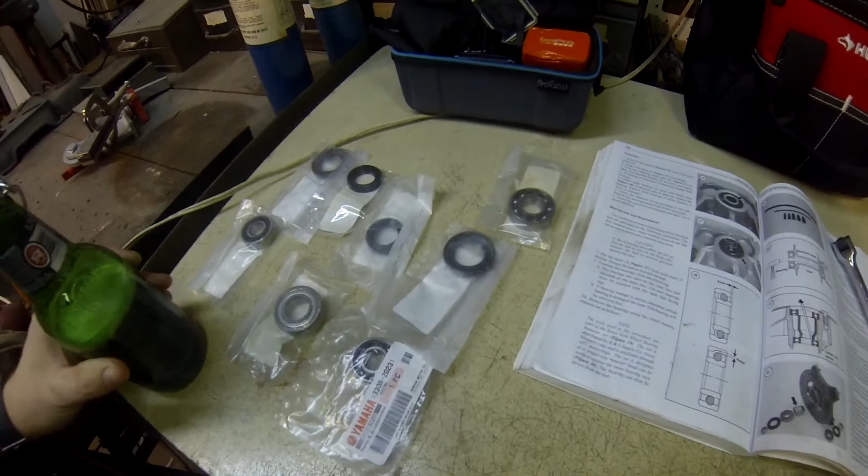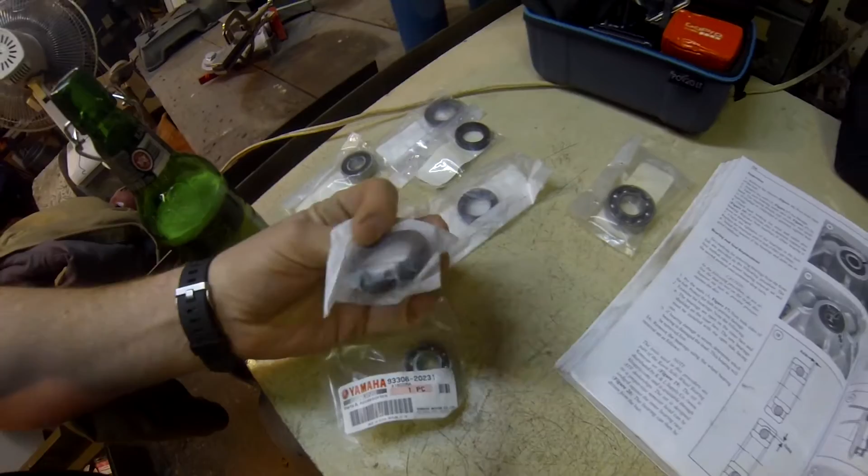I went with aftermarket wheel bearings after the stock ones went, and they only lasted a few years. So I went and bought the OEM ones again, and when you buy them they come in pairs. There's two different sizes, each side has two different sizes, and they come with the seals. I'll show more on that when I open them up.

I got my tools here: breaker bar, extension, ratchet, 14 to get the bolts off to get the wheel off, pliers to get the cotter key off, some punches for the bearings, and I'll be adding more tools as I get into it. I got a grease gun to grease up the bearings when I put them in, and a hammer to tap it out, but I'll explain more of it.

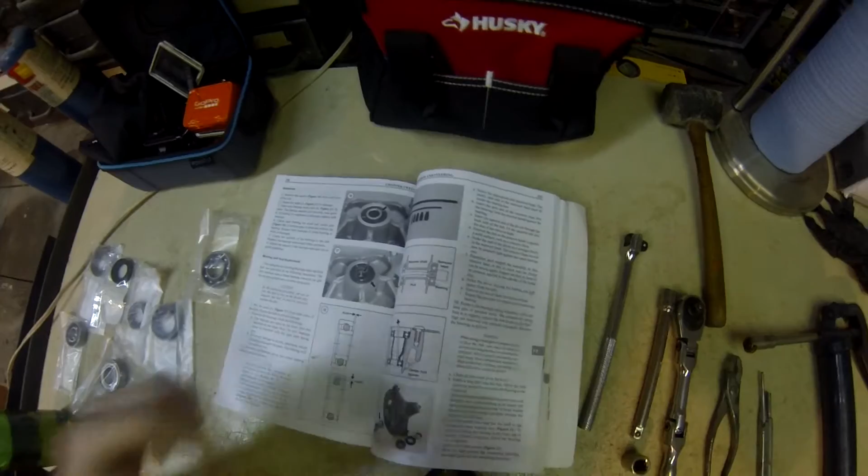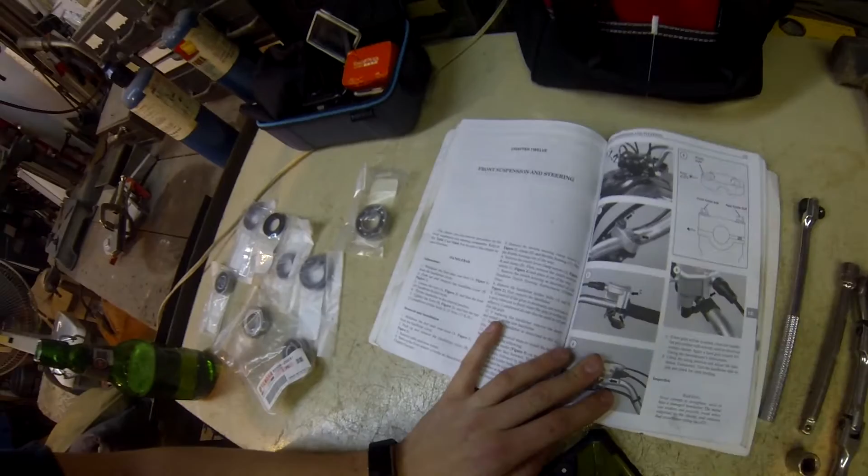This is the Yamaha Raptor 700 2007 shop manual, and this is handlebars. This goes into front wheel bearing here, and I'll hold it over as best I can, so if anyone wants to pause the video and read it.

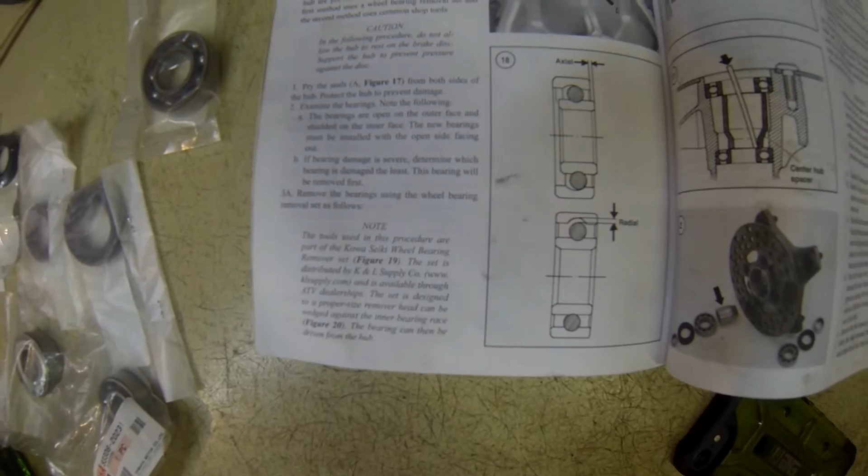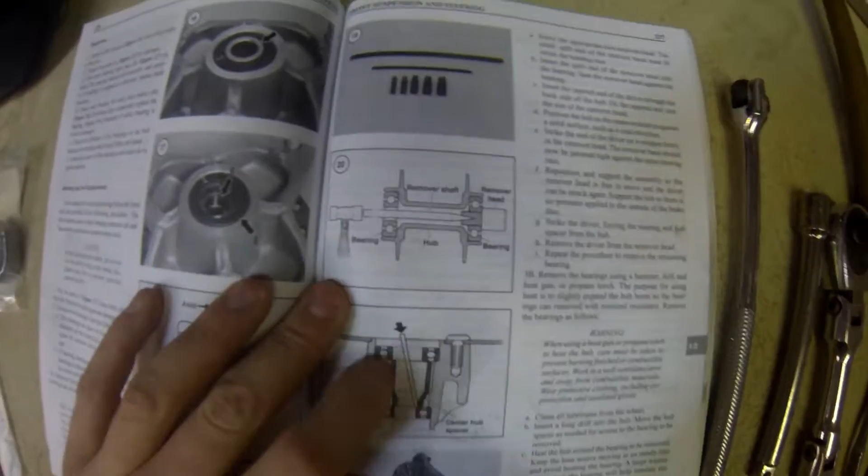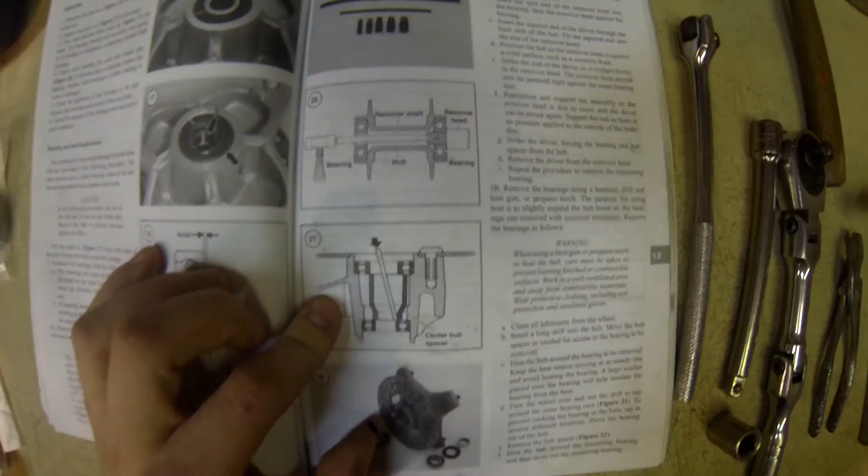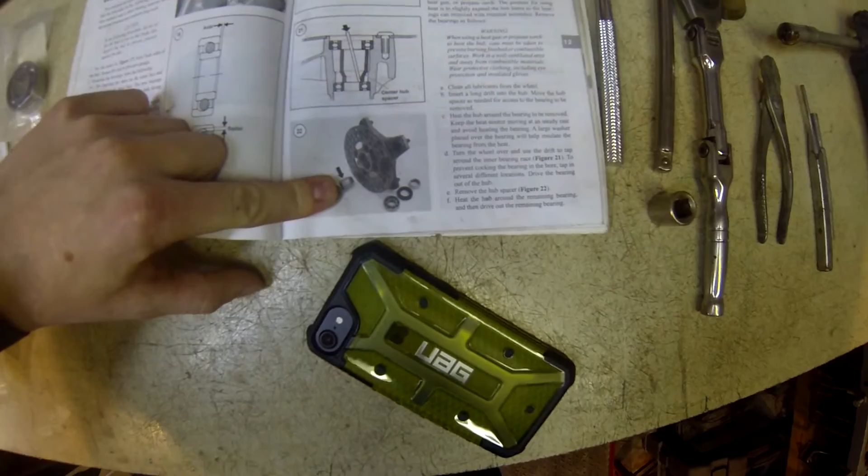I will show you this. This is how, once you take the hubs off, to remove the actual bearings in the hub. They're kind of tricky, it takes some time and finesse, but eventually you can pop them right out. You don't normally have to replace this spacer right here where my finger's at, but I assume it's going to be in good condition, so I didn't buy another one.

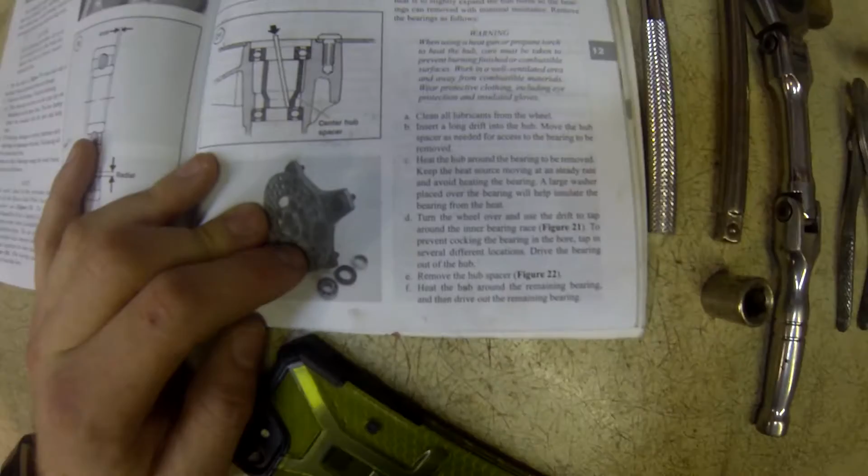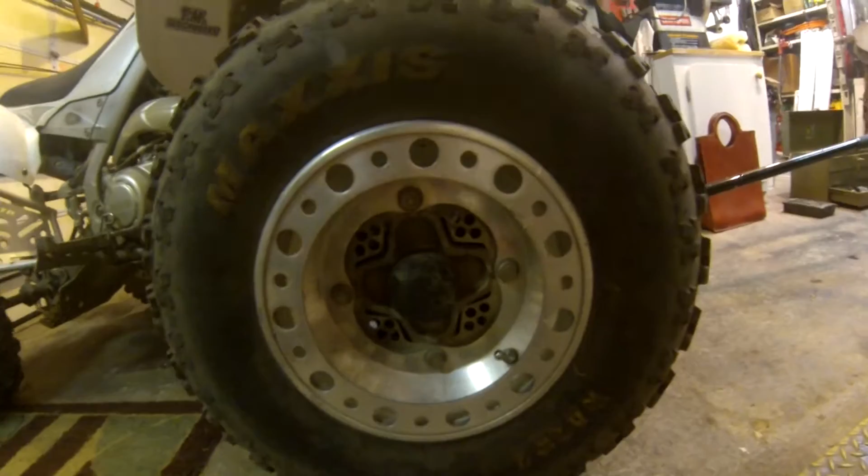Basically what I have to do is take the front wheel off, which I'll leave on the ground. I'll leave the tire on the ground, break the lugs, and then take this off, take this cotter key off. Once the tire's up and jacked up, take the cotter key off, take this nut off, slide the hub off, and then remove the bearings.

It's really not much to it, it just takes some time, and you probably need some shop rags or something because your hands are going to get greasy. My tires are actually a little wobbly, which I'll jack it up and show you here.

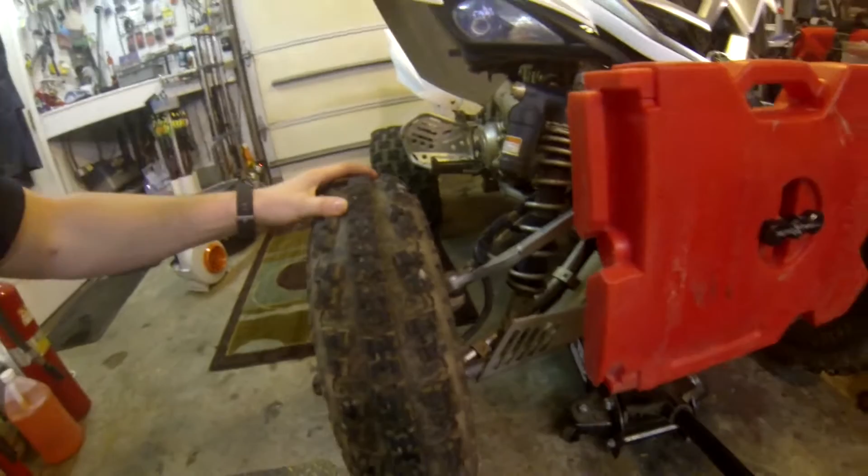I just got a regular car jack. Some people have ATV jacks, I have one, but I didn't feel like it was necessary. You can see my wheel, it's got some flop to it. That's how you check them, you grab them, move them back and forth, and it's got some play.

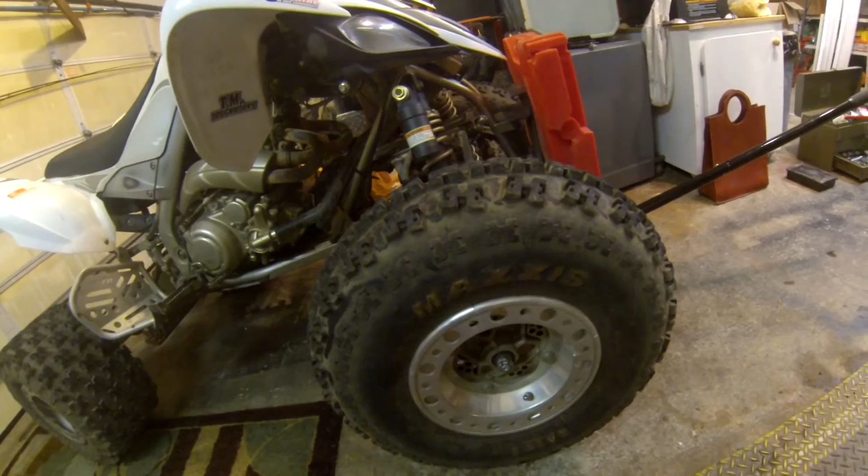I'm running the Razr 2s, I don't know if you can see it. Razr 2 by Maxxis, and these are, I think, the bigger front tires than the stock ones. I also have the Razrs on the rear. This is the GYTR edition, but from 2006 to I think 2008 or 9, the models don't change that much.

But a quick overview: I added some hand guards, an hour meter, redid my seat. Didn't turn out the best, but it's like a motocross seat, the Attack Graphics seat.

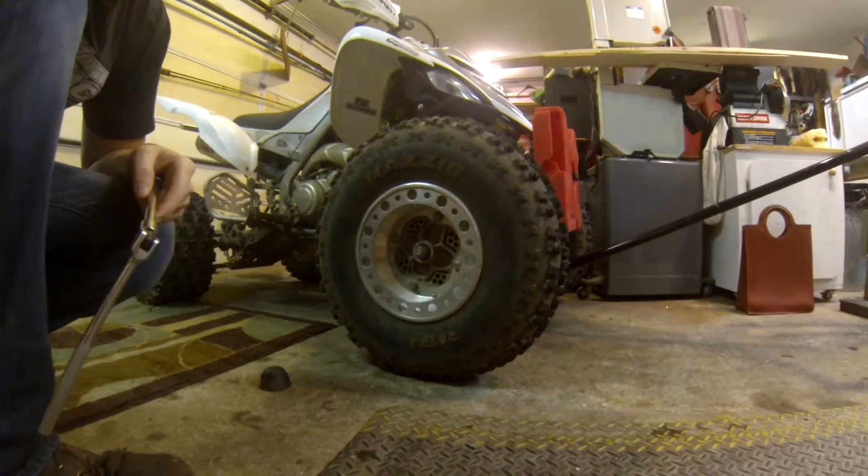But I'll get started here. So first step is to remove the cap and take off the lugs.

You want to make sure to keep your extension straight on there so you don't strip off the lug, because they can wear off, or corners wear down over time. So once you got them all broken, then you want to jack up the quad.

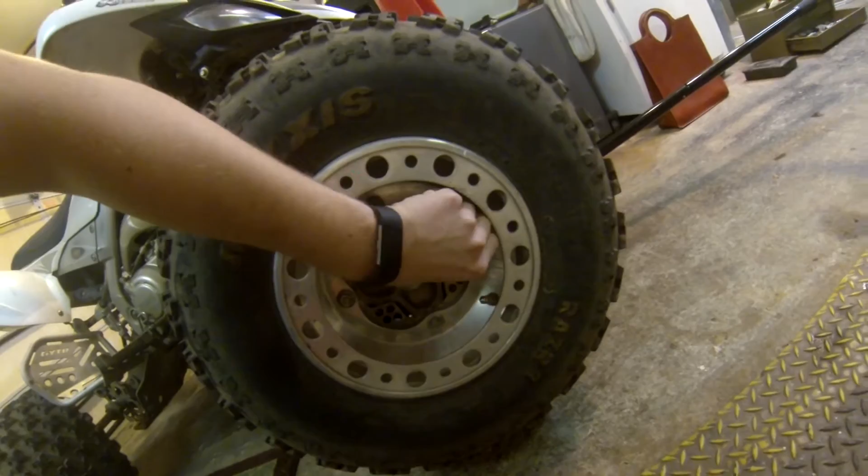Doesn't need to go crazy, just get it off the ground here. Apologize for lighting, it's not the best, but some people do things differently. It's winter time right now, so I'm just killing some time making a video, because I always like to see how people do things, and sometimes people don't know how to do things, so use YouTube to look it up, of course.

So you got your nuts and washers off. Take the tire off.

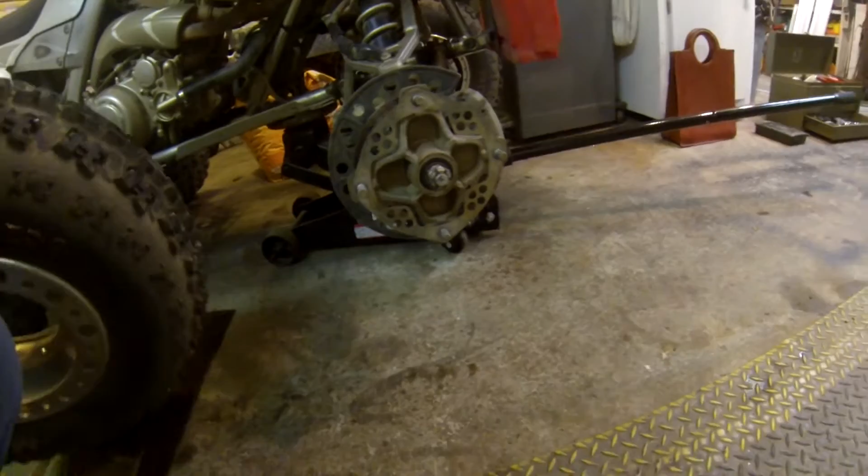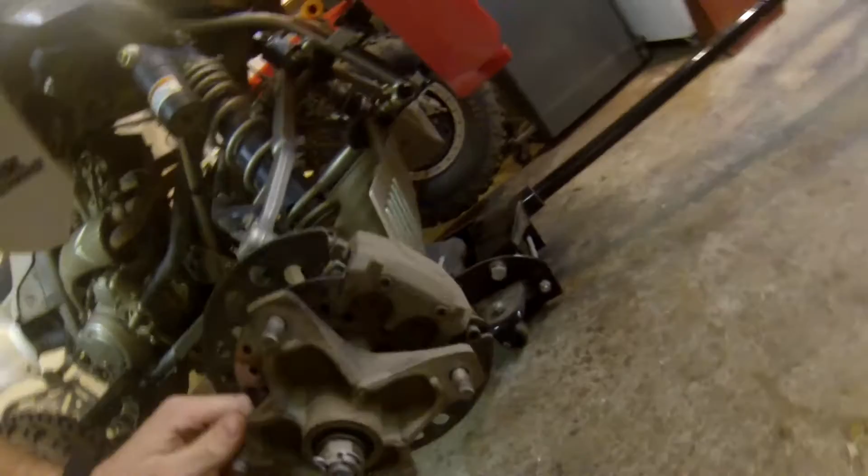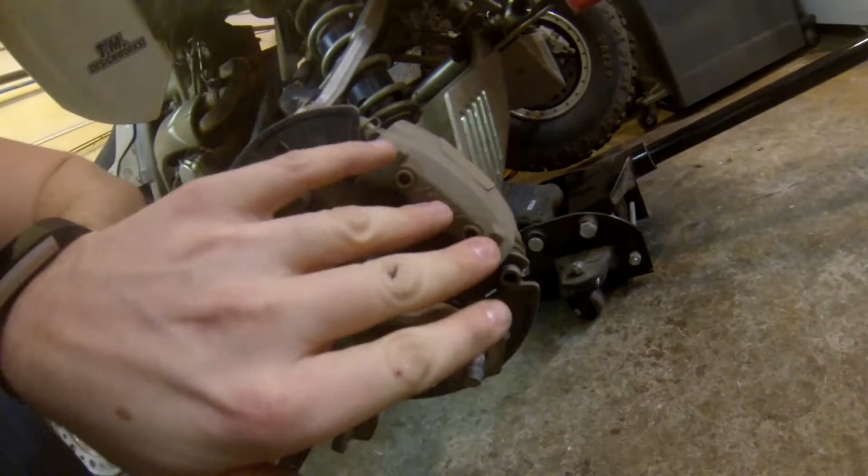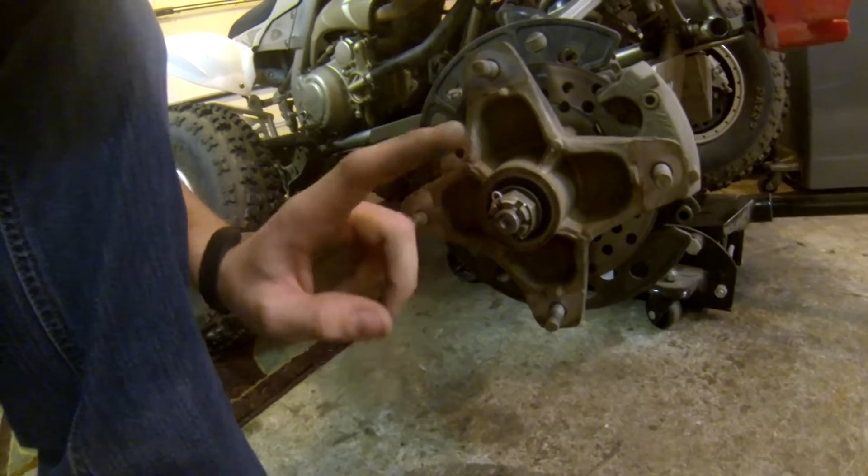Then you do have a guard, and I actually forgot to mention it, but you do need to remove the front brakes, and in order to remove the front brakes, you got to take off these two pins, slide them out, which releases the pads, and then after it's released, you can take the bolts out that hold the caliper on, and then the brakes should slide out, which I'll show in the video. And then after the brakes are off, I will be taking off the pin here, then the nut, and then I will drive the hub off to get to my bearings.

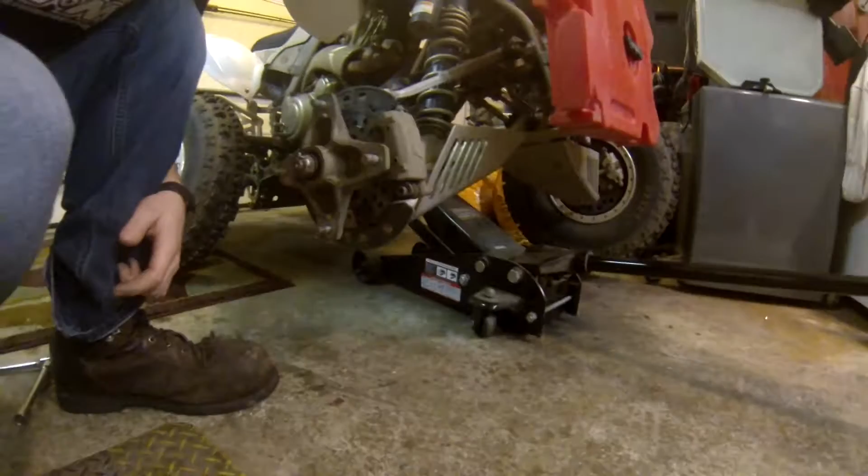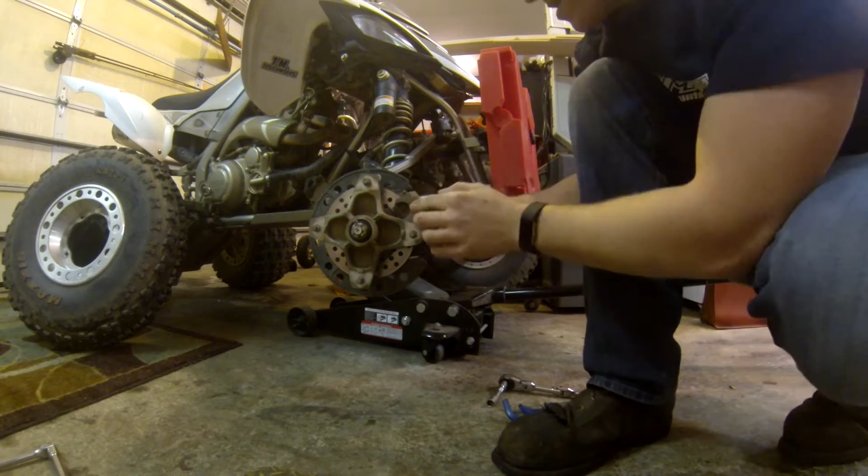Alright, so I'm taking the brake caliper off, and I'm using a number 5 Allen wrench here. Sorry it's kind of dirty, didn't have much time to clean it. Normally my quad's pretty clean. But break these, these are the pins that hold in the brake pads, so you break those.

Might have to spin the hub there in order to get at the pins there. Just for the video, I'm going to leave it so you can see them. And my pins are pretty dry, which means I'm probably going to want to clean all my brakes up and replace all those.

This kind of takes some time here. I'm no mechanic, but I don't like to let a dealership work on my stuff. You just kind of gotta wiggle the pins to get them out. These are pretty... I don't know if I've ever changed the pads on this.

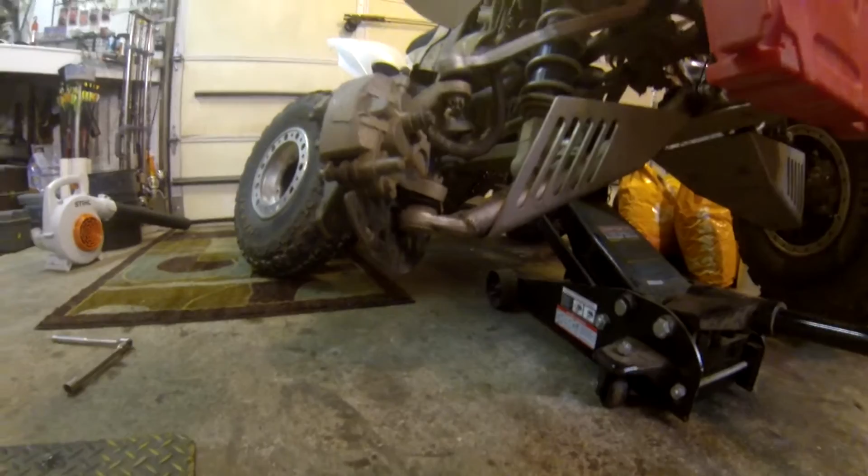I got my pins out, throw them in the pile here, and I forgot to mention that the bolts for the tires are a 14 millimeter. So now that those are free, I'm going to rotate the tire or hub, and you can see that I got a bolt here and a bolt here which hold on the caliper, and I need to take those off.

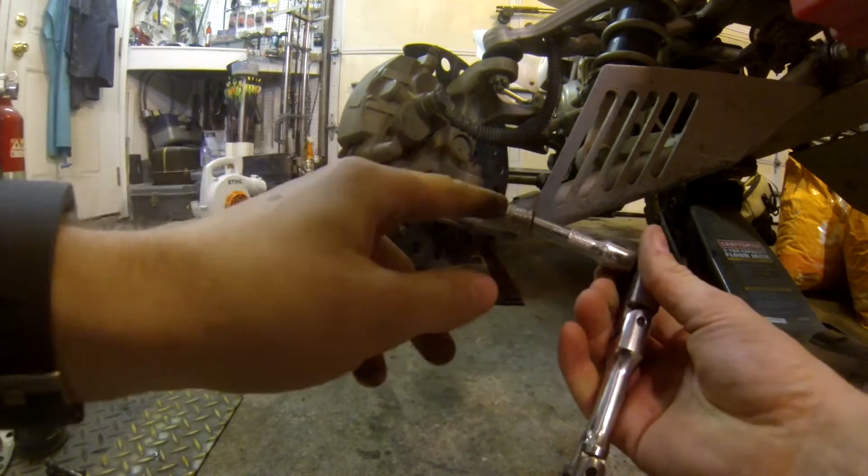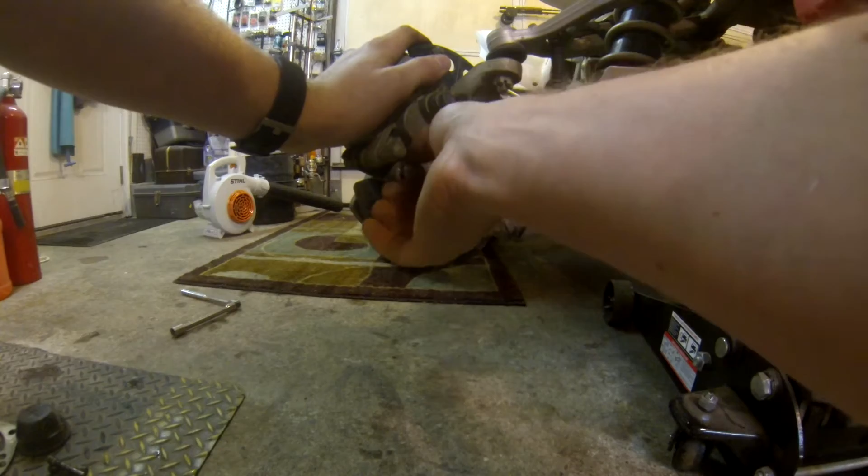So I got a number 12 extension ratchet, and I would recommend when you take anything off to check the bolts and see if they have any Loctite on them. And if they do, when you put them back on, make sure you put some kind of Loctite, or the machine's gonna fall apart on you on the trail, and nobody wants that. But I got my bolts here, and it looks like there was a bit of Loctite on there, so when I go to put it back together, I will add some Loctite.

My Raptor will look a little different here because I do have these A-arm guards. They don't come with them stock. I forgot which brand they are, someone's probably going to ask.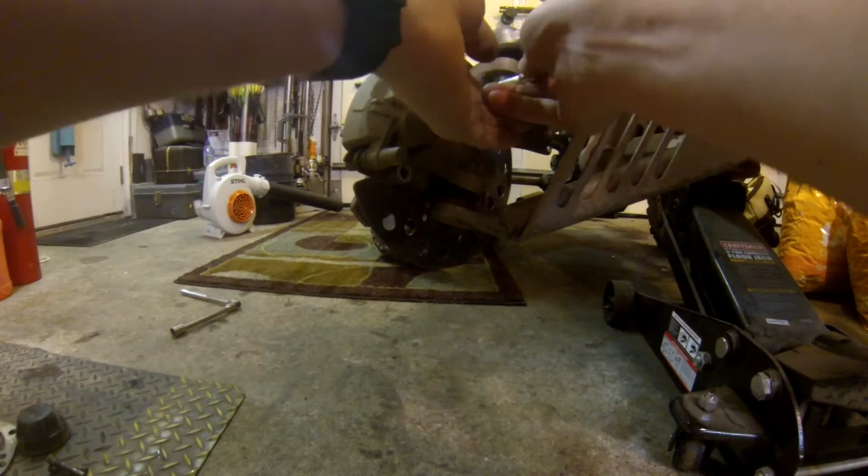So now that I got my bolts out, my pads are loose. As you can see, the caliper's flopping around now, but the pads are still on a little bit. Kind of gotta wiggle them a little bit, get them off, and now I can check my brake pads.

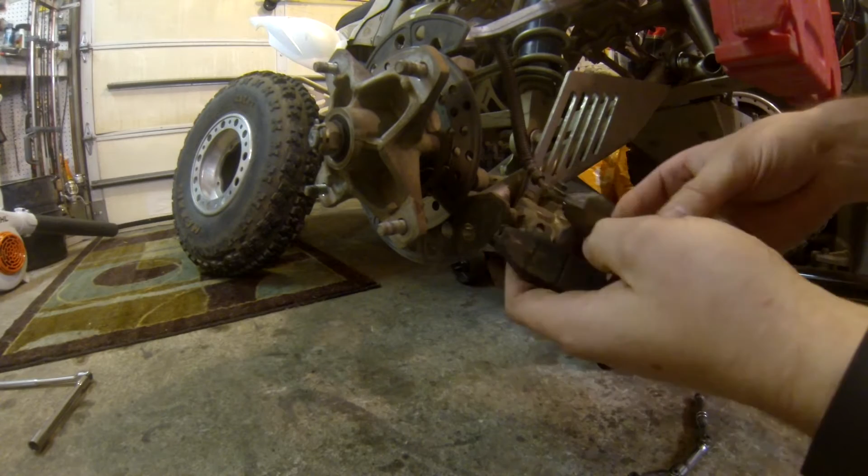Pretty dirty, like I said, you need rags. These are pretty worn down, probably should replace them, but I'm not too worried, I don't use the front brakes too much. But now that I got the pads off, got the caliper, I want to take the caliper here and tuck it up here, keep it out of your way.

Now I want to remove the cotter key, so you need some pliers. So you take the cotter key off. This one I might actually replace because it's kind of rusted up, I do a lot of water riding, mud riding.

So now that I got the cotter key off, I can remove this, the hub nut. Alright, so now I have a 22mm socket with a breaker bar wrench. I wouldn't use a ratchet on it because you don't want to break your ratchet, unless you don't have a breaker bar. But when you go to tighten this nut back on, it is actually 52 foot-pounds.

So I would recommend using a torque wrench to tighten it back down to set the bearings so it's the right torque. Take this off.

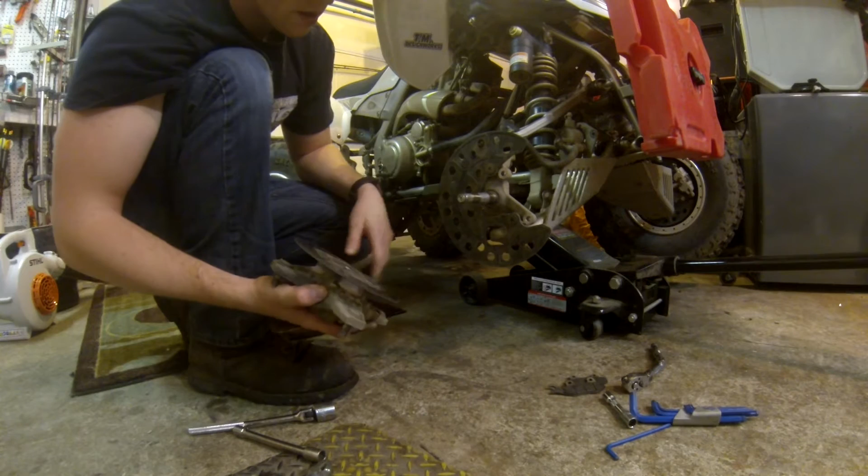This guard right here should be floppy. That's a stone guard, it's no big deal. I know some people probably take them off, but you can see the wear here. I don't know if you can see it on the camera, but...

I could probably use new front brakes, but I don't really use them that much, so I'm not even really bothered. You can check your bearings. Mine are pretty...

Grindy. Stick your finger in there and roll it, you can feel the difference. They should just be real smooth, and these are kind of grindy. I probably could have got another year or two out of them, but I don't like to have any breakdowns on the trail. I would rather do it now than later. Spend more time riding.

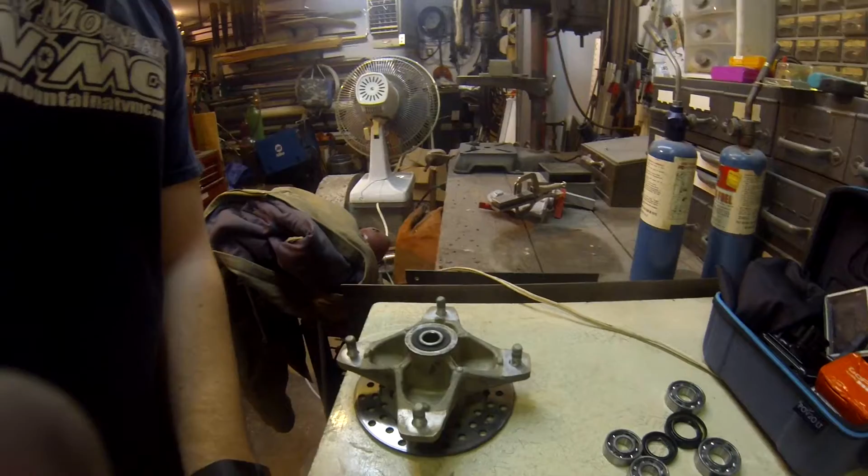Alright, so I've got a couple tools to pry out the seals. These are the new seals. I actually kind of got them dirty.

But anyways, you got spacers in here. Take those out. Stick your screwdriver in here, and you want to actually just twist it all the way around, so your seal pops out.

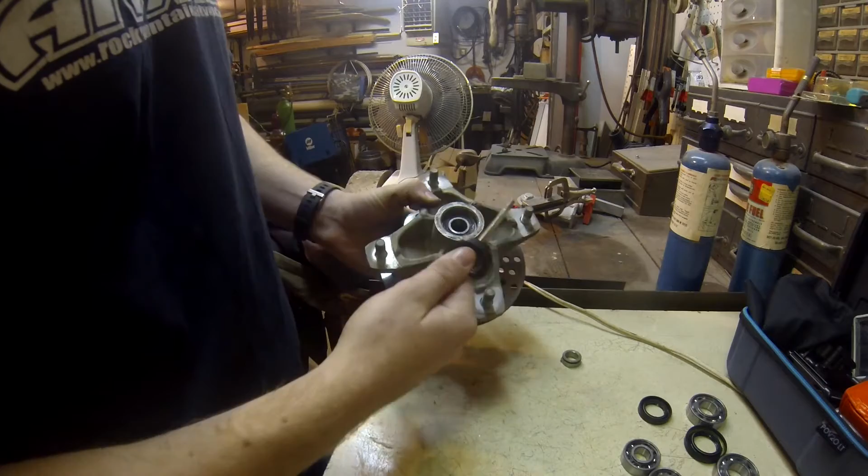And then flip it over. Take your spacer, pop that out. And stick your screwdriver in the other side. Again, gotta twist it and pry up the seal.

It's gonna take some doing. You might tear up the old seals trying to remove them, so it's always a good idea to buy new ones.

I don't know what this tool is used for, but I use it a lot for prying out some stuff. Took a little wrecking bar. So,

I got my old seals out. They're pretty dirty, but not too bad. The insides aren't blown out or anything, but I am going to replace them since I have it apart. You are going to want to clean up all your spacers real good before you put them back in.

This is the part that you kind of have to play with. I don't know if you can see it on the video here, but you got your bearings. This is the bigger one, this is the smaller one, and then inside there's a cone spacer. It's like tapered, and that's where it gets tricky for getting out.

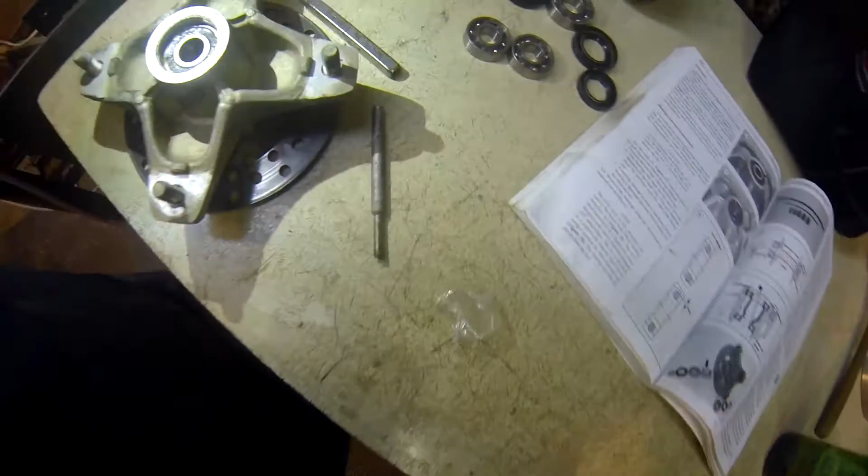So now I have to remove the bearings here. You can't just drive them one way. As you can see in there, I'm trying to get some light in there to show you. There's a little lip, and you got to take the punch, put it on the lip, and rotate it around like this as you pound it out.

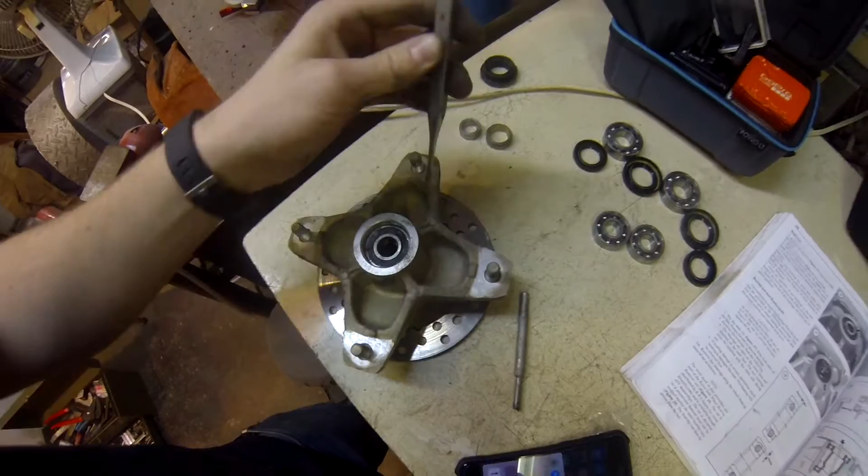And one side, the bearing will drop out this side, and then you flip it, and you do it from the other side. Right here is a diagram...

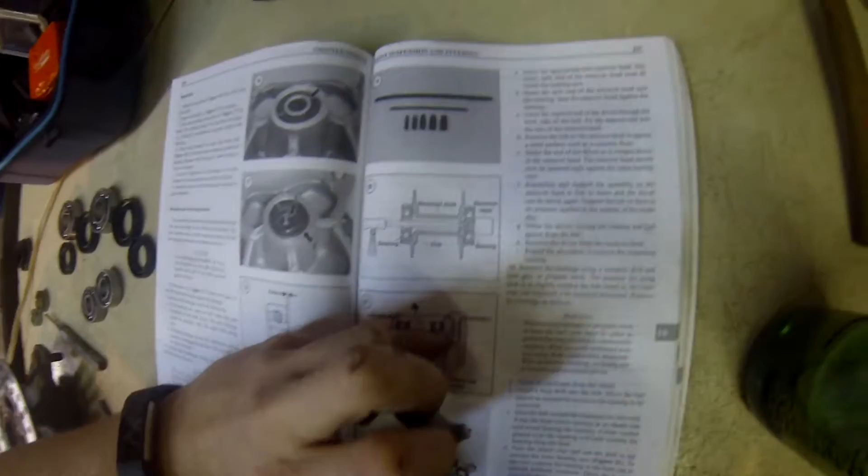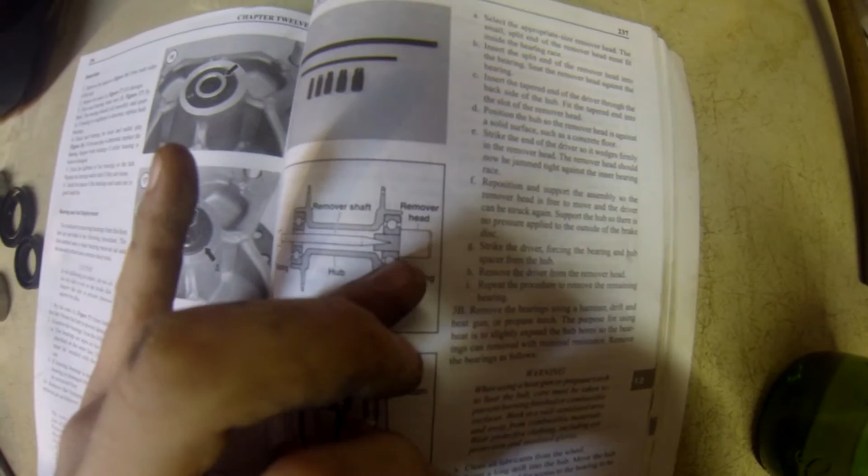Where you got your hammer, you got the bearing that you're going through right here, and you're actually sliding the punch through, and you're rotating it, and you're hammering out right here. You're getting on the edge of the bearing and hammering out. Okay?

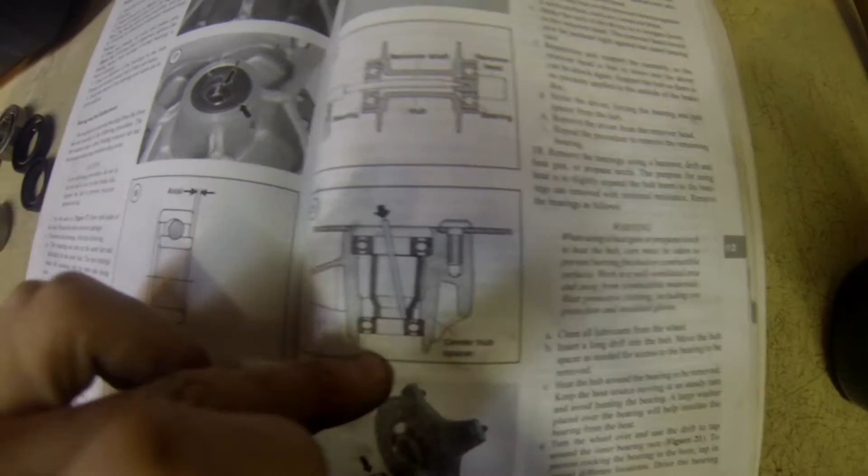And this is the way that the manual says to do it, so that's the way I'm going to show you guys how to do it. If you got another cool way or an easier way, I'd love to know.

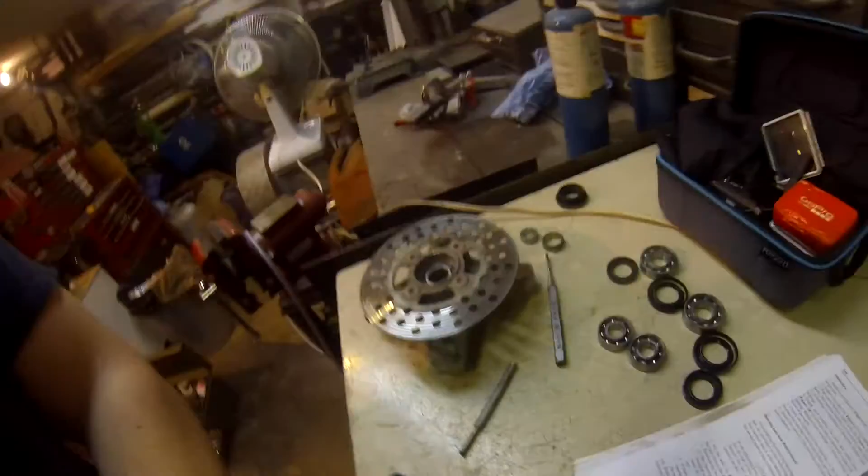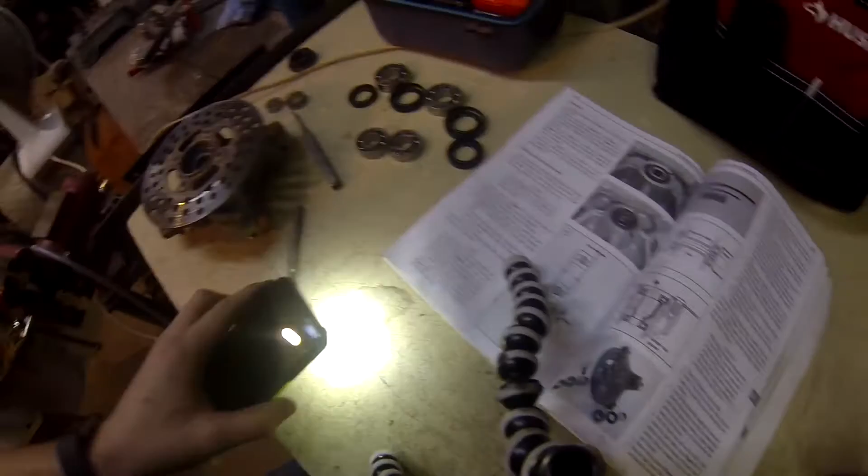So you got a bearing here, and then in between you have this collar, which is this right here where my finger's at. It's like a cone shaped spacer, and you have to remove all those in order to put in all of the new bearings.

So there's really not much to show here for pounding out the bearings. It's kind of hard to videotape or even see, but you gotta take your punch, put it inside, and actually rotate the collar or spacer to the side, and you'll see the lip of the bearing. You gotta take your punch and put it on it.

Probably might have to sharpen up your punch. Like I got some dull ones here. Sharpen up your punch and then put it on that edge and hammer it out.

So I ran my punch here on a grinder because I need a sharp edge to stick in there and hook the edge of the bearing, because it is going to take some time.

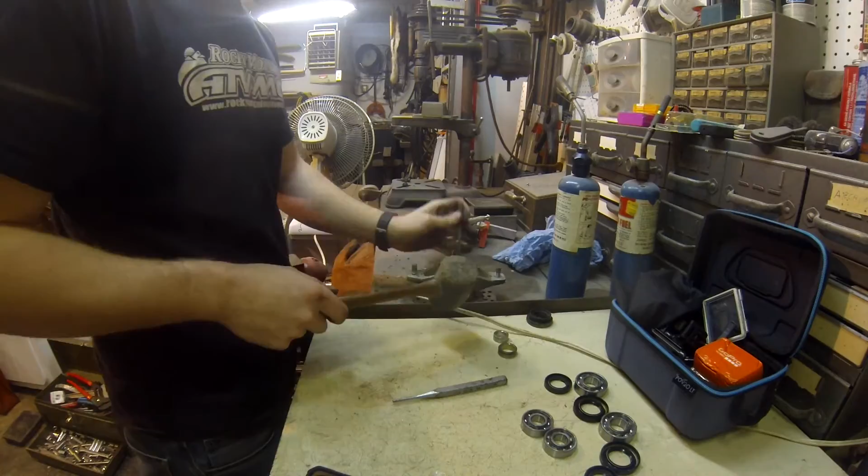So I didn't show this on the video, but I took heat right here. Heated it up around here, flipped it over, took my punch, put it in, and started hammering it out till it came flush.

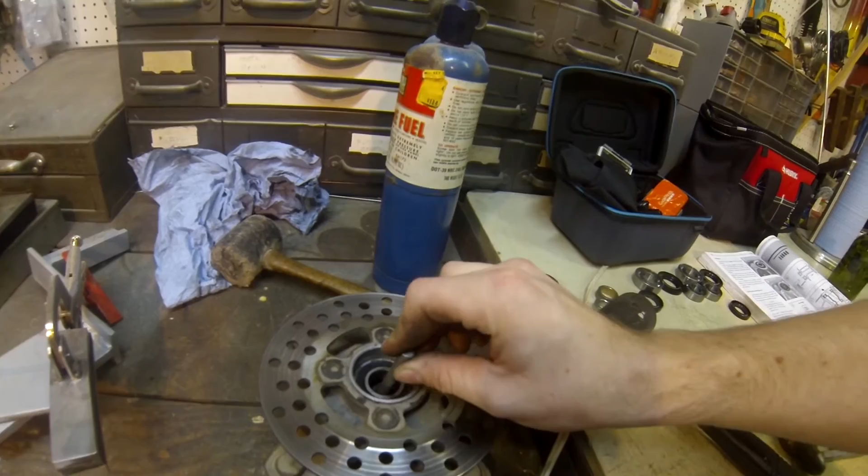It's flush right here, all the way around. Now I need to set it up on something, where my fingers are at, so when I go to punch it, the bearing has room to pop right out, instead of flat on the table, or it won't come out.

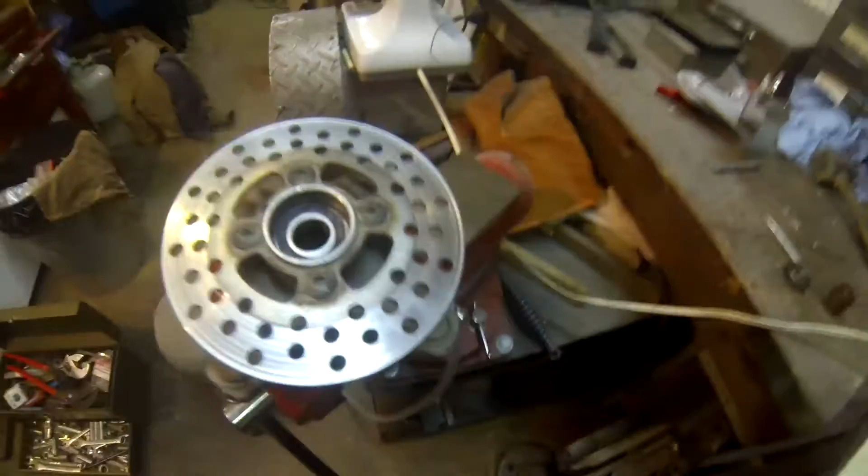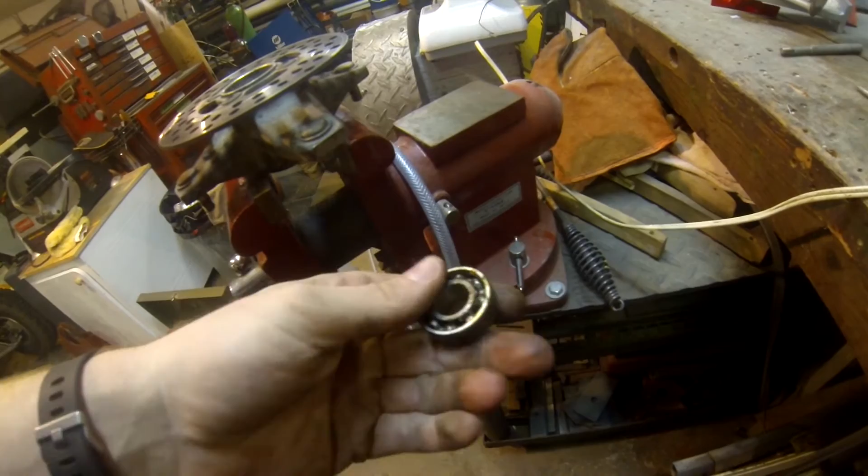So what I did was I put it in the vise, and none of my studs were hitting anything, so they didn't damage the threads. I started punching through, and my bearing dropped out. This right here is kind of hot. I kept adding a little bit of heat, and it makes it slide a lot easier.

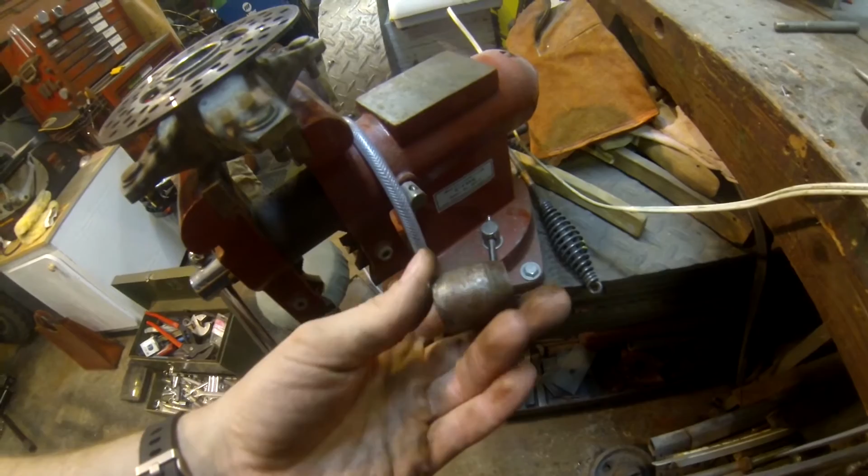And this is the spacer I was talking about. That's the one you want to try and not scratch up, but as you can see, it's kind of rusty. So it was good that I took it out. And now what I have to do is take out this bearing right here.

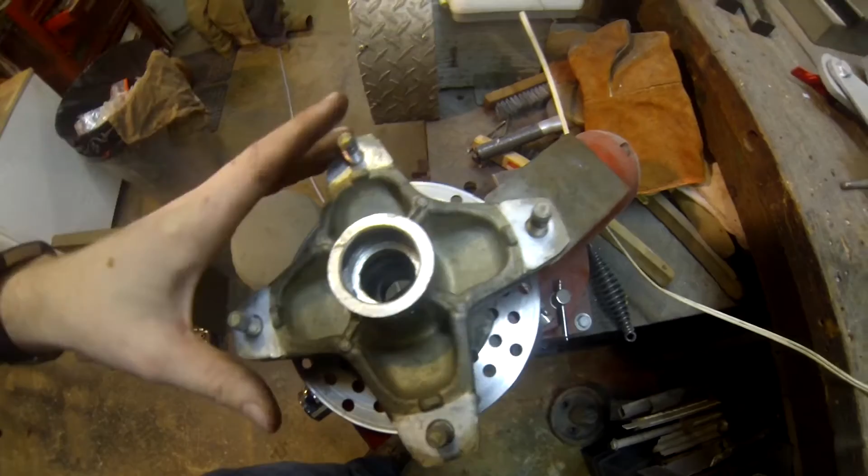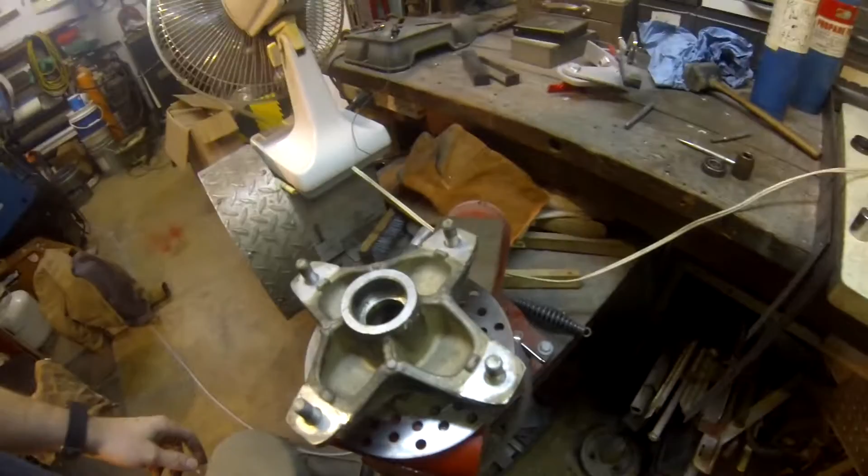There's what the inside looks like. That's why you can't just drive it one way. You got to drive it out one way and then the other way. But now it's easy, so all I got to do is reach in there with my punch and punch this other bearing right out.

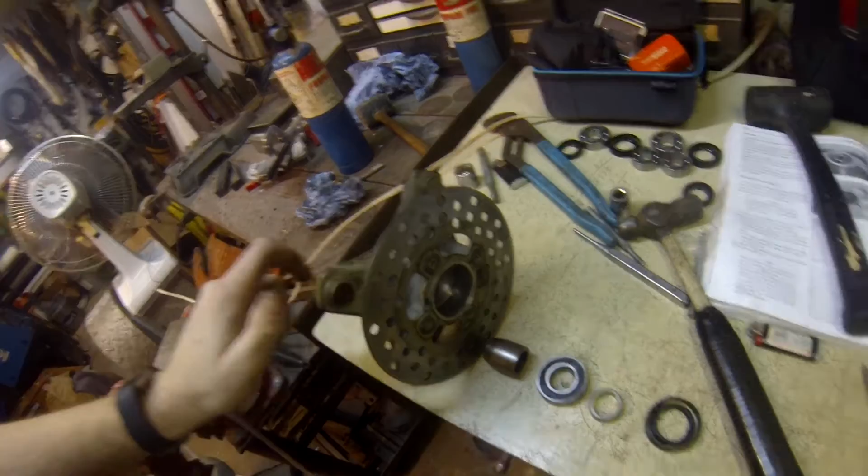So I got out all the bearings, and as you can see, there's that sleeve in there on this side and this side. I got it cleaned up pretty good, and I'm going to show you here how it goes in. So you got your seal, you got your bushing, you got your big bearing for the big side.

And then you got your, I want to say it's a spacer or collar. And this actually slides onto your axle here, and I'll show you.

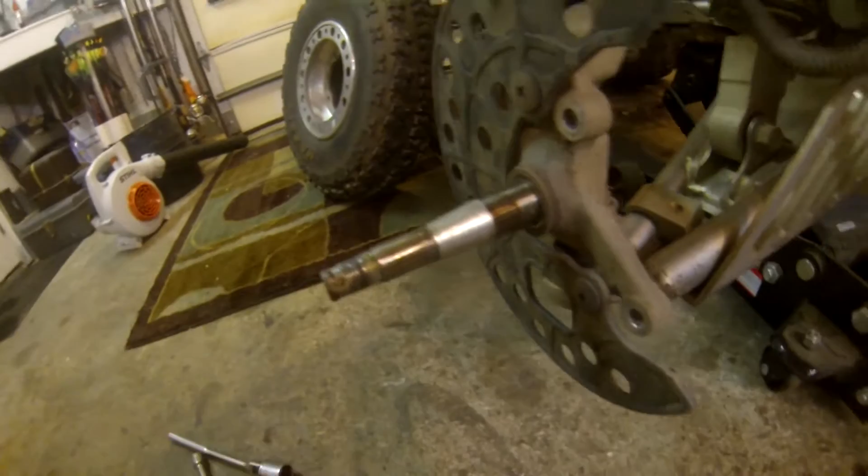So we'll go over here, and when you put it back together, the shaft, if you dent it up any bit from trying to get the bearings out, what you can do - I kind of had trouble with it at first, it'll probably get stuck about there.

You just take your hammer and you lightly tap around the edges real lightly until you can get it to fit. And then slide it on, make sure it's going to work, because you don't want to have the struggle after you already put it back into the hub with the bearings. You want to make sure it's going to work.

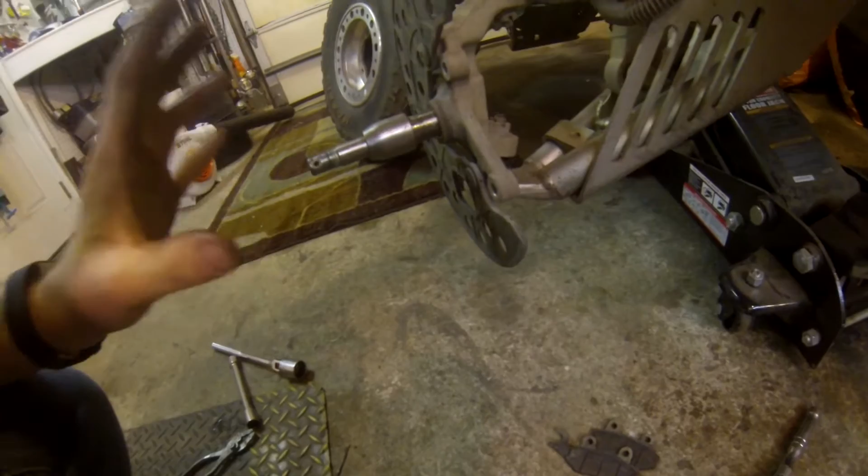So you come over here, and if you need to figure out the exact way it goes inside of the hub, you can bring it over here and set it up and make sure you align everything right.

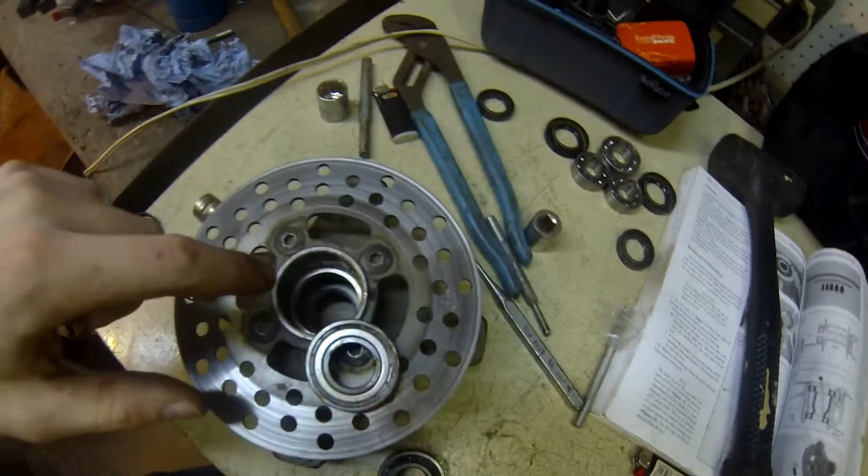So I greased the inside of here, which you can tell it's greasy, and then I greased up the bearing nice. It's kind of slippery, but any excess will just slide right out.

And I packed this full of grease. It didn't come full of grease, but as you can tell, it's got like a metal collar in here, and the aftermarket one had like a rubber one. I will see which one works better. I don't know.

So what I do to set these, you try to get them even and then you slowly tap around the edge, and you want to make sure it's nice and square going in, so you don't bind it going in.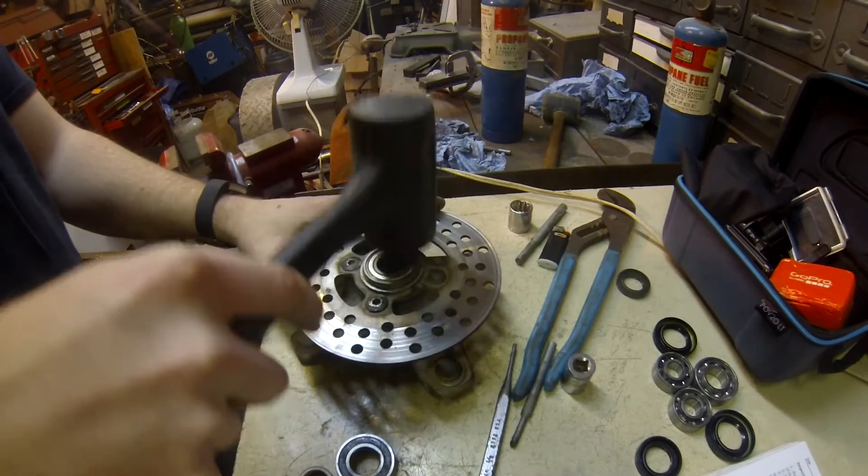So now that I have it in, it's nice and flush, and I will find a socket that fits over top of this, put it on top, and then actually hit the socket with the hammer to set the bearing all the way in.

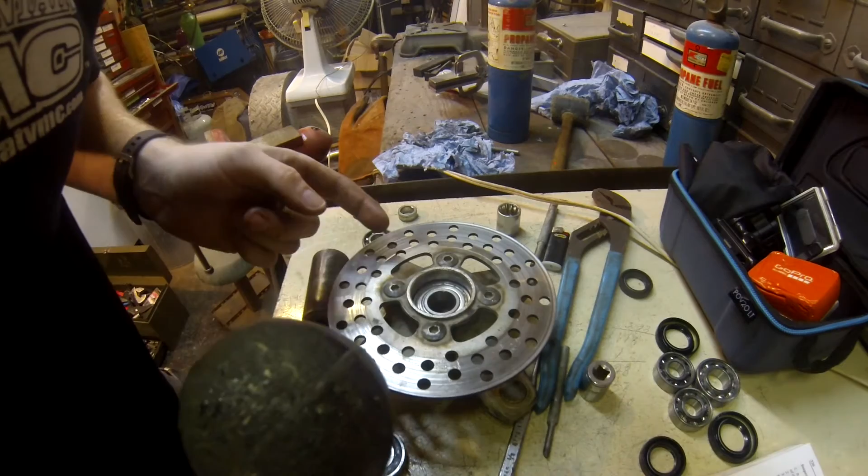When your bearing is set all the way in, and you know it's all the way flush, you can add some more grease to it. I do a lot of water riding, so I always want plenty of grease.

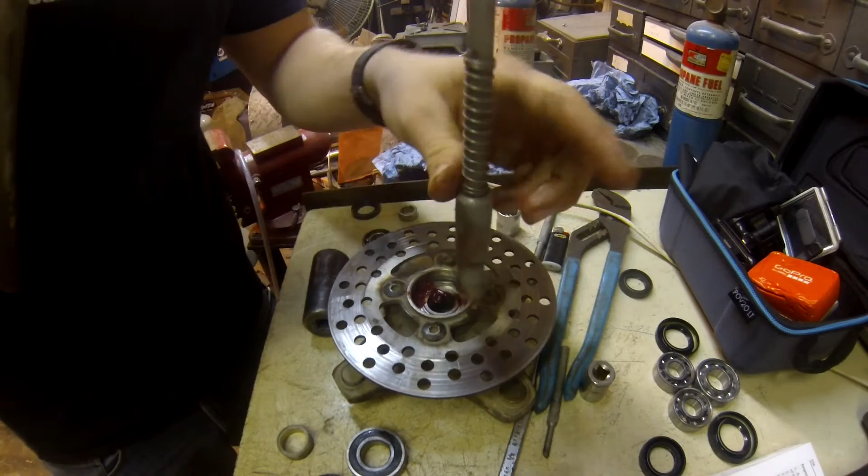The only thing that will happen is if you get too much grease, it'll just come out when you compress it all in, when you put it on the shaft, or when you put the seals on, and then you can just wipe off the excess. So the only thing you're wasting is grease.

Then I'll take my seal and I'll fill that full of grease.

You want to be careful because there's a little spring inside of this seal, and you don't want to damage that spring because it helps it seal. So you got to be really careful when reinstalling the bearings. It's nice and greasy, grease everywhere. You want to put the open side down.

Just push it with your fingers as far as you can, till you get it started. Then you can use a mallet or hammer or whatever you're using to tap it in real slow and easy.

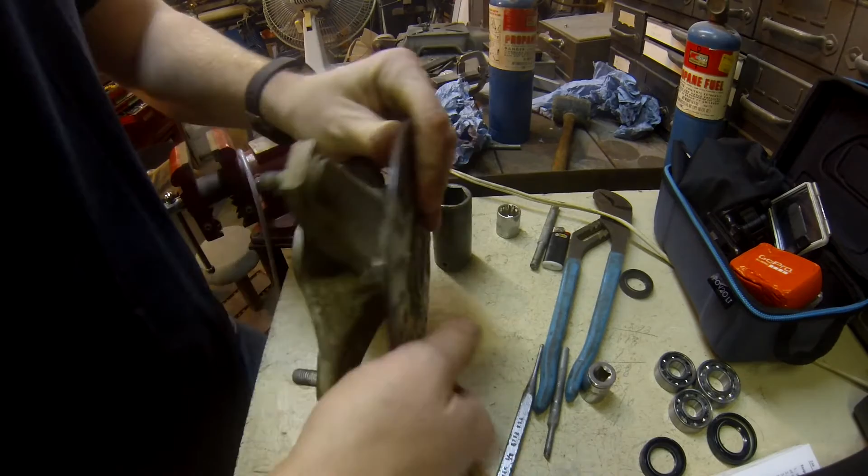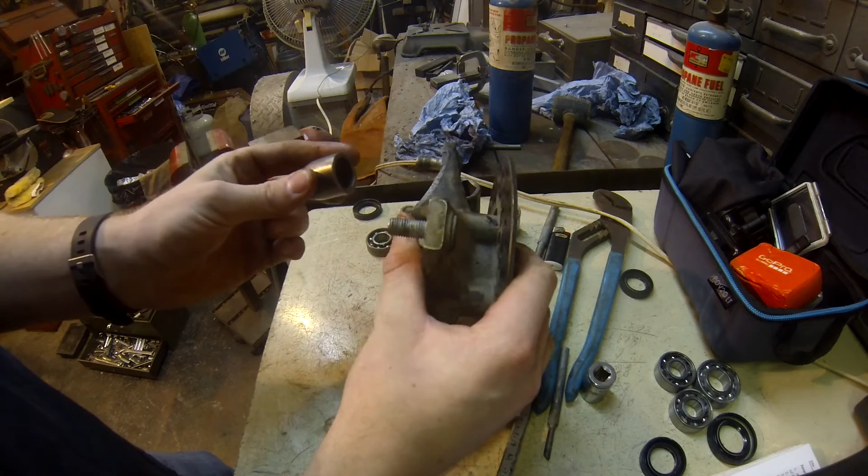Then I'm going to take my socket here and drive it down. I take the old stock spacer, insert it where it was before, and that's the bigger side done, this will be the inside. So I want this big spacer to fit so it slides in this way, and if you don't get it right, you have to take this all back apart and spin it around. So now I just grease up this.

You need to take your smaller bearing and fill that with grease if it doesn't already have enough on it. Grease is just a preference, you could probably do it without it. It depends on what kind of riding you're doing. I do a lot of water riding, I go down south in the mountains, so I like to add lots of grease to everything.

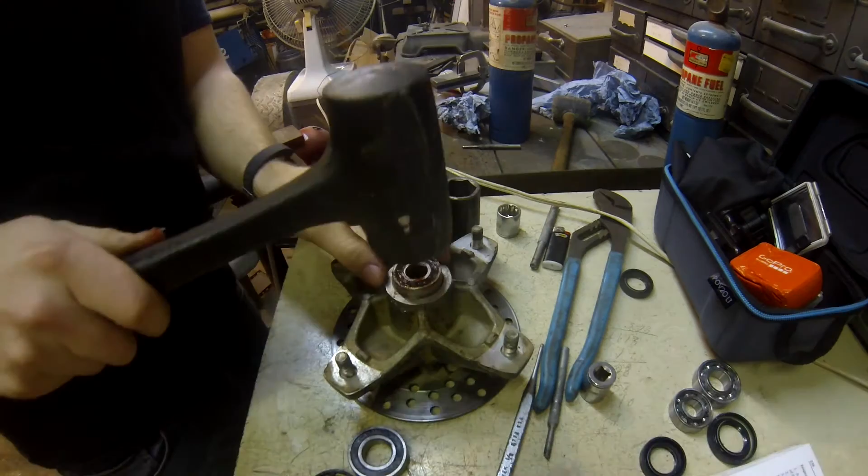Slowly tap it in. Try and make sure it's even as you tap it, or it'll bind on you. That just slid right in for me, no big deal. Then I want to go back and find another socket to fit around the bearing, tap that down real nice and gentle so you don't put any kind of torque on the bearing or knock it out of round, so it works just right.

Alright, now that my bearing is set, make sure you still got plenty of grease on there. Everything lines up right. And you can play with the spacer inside to see how tight it is, and you might want to tap it till it gets harder to move, or you'll have to compress that later, and it might be a big pain.

I take my new seal again. Got to make sure it's clean before you put it in. Take your new seal, the depth looks like it's gonna fit. Fill it full of grease.

So now that I got it coated with grease all the way around, got everything lubed up, slide my seal in with my hands. This one slid right in nice. And then take your spacer that you took out before, grease it up a little bit, slide it in. Should be flush. And that's how you reinstall bearings.

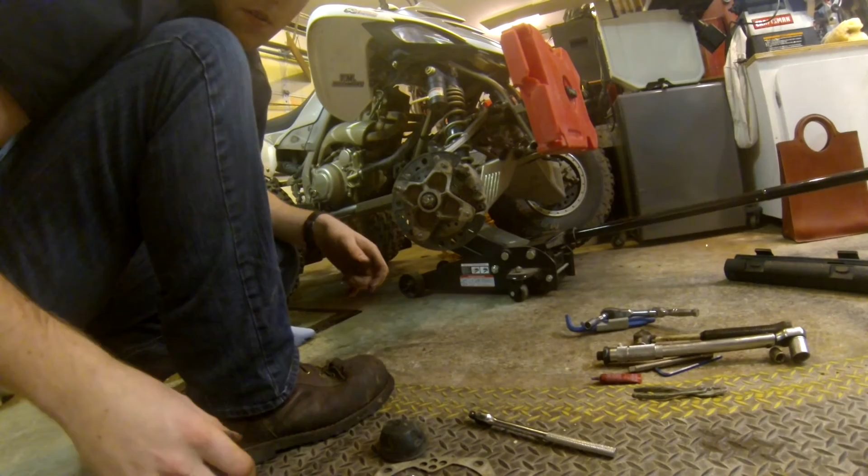Alright, so now that everything's back together, I put the washer back in. You got your brake back on, you got your pads in. If you bought new ones, you put new ones in. You greased everything up, use anti-seize on that. I use blue Loctite 242 on the bolts so they don't come back out. You want to install your little guard back on here, and install your wheel.

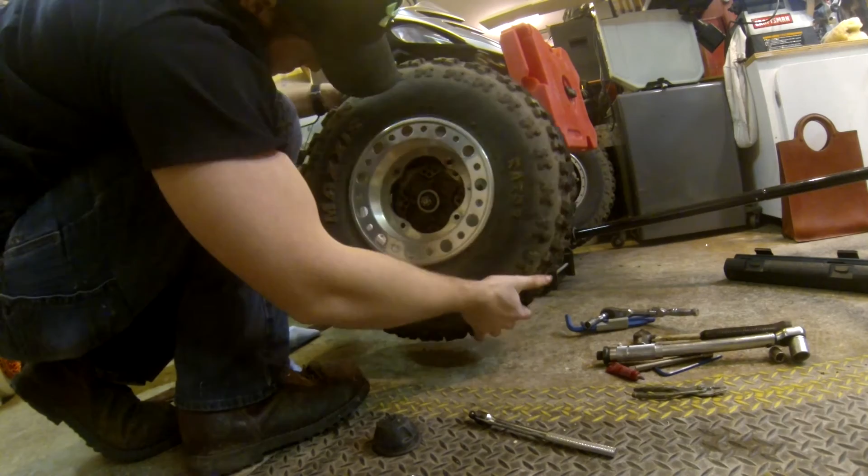Everything in this video also applies to the other side. When you buy your wheel bearings, depending on where you get them from, where I got them, they were sold as two. So everything I bought, I only had to buy it once because it came with double for both sides. And everything applies to the other side.

What I didn't show in the video was I added heat to the hub to expand it so I could get the bearings out. I didn't have enough hands, but that is recommended. Just don't add too much, be very careful. And that is how to replace a wheel bearing on a Raptor 700.